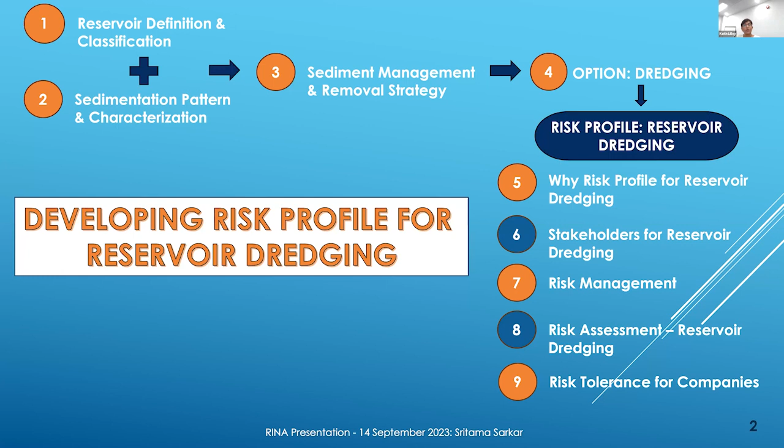Firstly, how we define a reservoir. So I have taken the reservoir definition from the National Geographic, and it says it can be any artificial lake which can be storing water, and most of the reservoirs are formed by constructing dams across the rivers. But a reservoir can be from a natural lake whose outlet can be dammed to control the water level. So throughout my presentation, whenever I say reservoir, I'm considering both man-made as well as natural reservoirs.

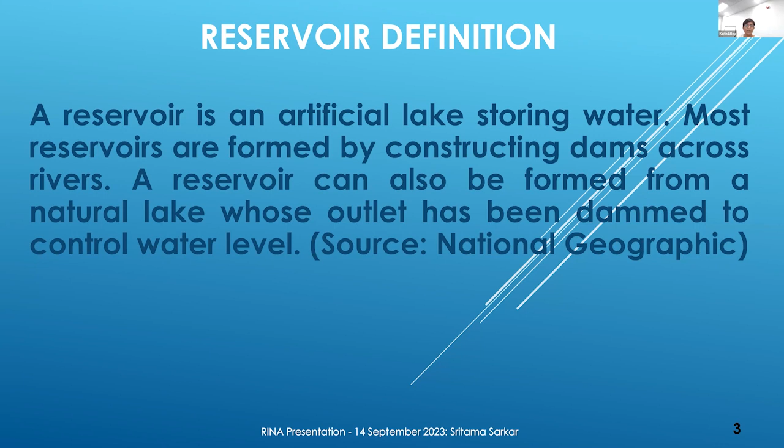Just an overview of reservoir classification. The origin, as I already mentioned, can be natural or man-made. The size of reservoir varies from country to country. Some countries use the storage volume, some the surface area, width or depth or length of the reservoir. Just as an example, I have taken the standard used in India.

So in India, the reservoirs are classified small for area less than 10 square kilometers, medium for area between 10 to 50 square kilometers, and large for area greater than 50 square kilometers. The position and the location of the reservoir is very important in terms of defining the material characteristics. So depending on the position and the location, the type of material present within the reservoir varies.

So for the position, it can be valley dammed, so it's in the mountainous region where the reservoir is between the valleys. The bank side, where water from rivers is taken into a reservoir or an existing reservoir. And coastal, it's very close to the coast, as is evident.

The purpose can be flood control or hydroelectric generation. It can be specifically for domestic, agricultural, or pisciculture purposes. It can be for municipal or industrial purposes, or for tourism purposes, or creating habitat for birds and animals.

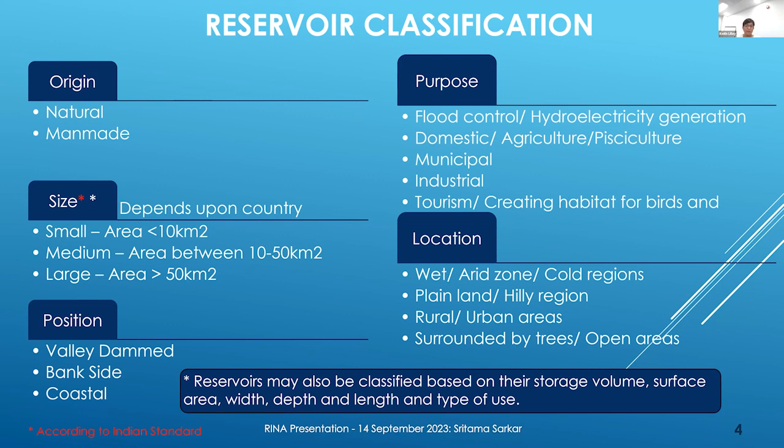This slide just shows us a schematic, and it's not to scale, of the sedimentation profile for a reservoir. So the words which are written in red, those are all the processes which you can find in a reservoir area. So the inflow can be the water from the surrounding streams, and the inflow can be water as well as different types of sediments. The seepage depends on the type of bedrock, how porous the rock is, whether there will be enough seepage.

Then there is evaporation and precipitation, which depends on the area where the reservoir is located. And again, the precipitation and the rate of evaporation can vary from season to season, and that controls the amount coming in and the water velocity inside the reservoir.

The left-hand side is a Hjulström diagram, which is the fundamental of relating the velocity profile within the reservoir to the particle size. So depending on how the water velocity profile is within the reservoir and the particle size, the particle can either be eroded or it can be transported or deposited. So here, at the beginning, where the deltaic region is, the velocity is quite high, and you get the gravel, cobble, and sand size particles here. As you move along, you get finer sediments towards the end of the reservoir where the dam is.

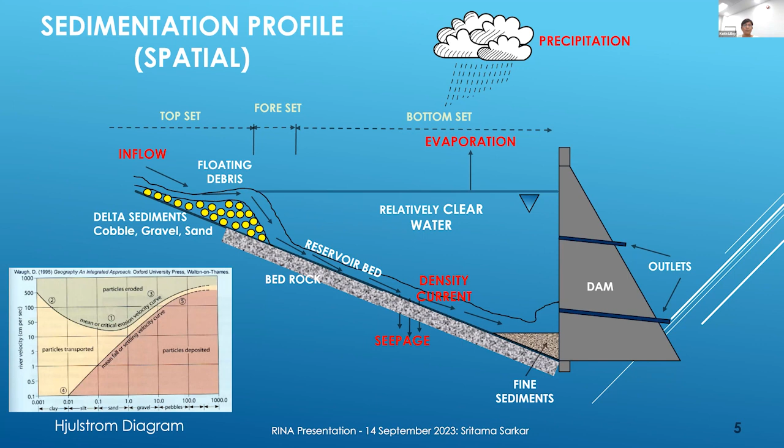So to know the material characterization within the reservoir is very, very important. And as I mentioned, all the processes which are prevalent for a reservoir need to be considered. So for the material, I have divided it into sediments, contaminants, and aquatic plants. These are the three main groups of material which you can find in a reservoir. The PIANC sediment classification is a very well-known classification in the dredging world, and that classification can be used for reservoir classification purposes as well.

The sediment source can be generated from the erosion of the bank, or can be transported by water, or can be waste disposal from nearby communities. And this is a big problem for quite a lot of countries. I will show some pictures later on, which show some of the waste disposed there. It can be transported by wind or water.

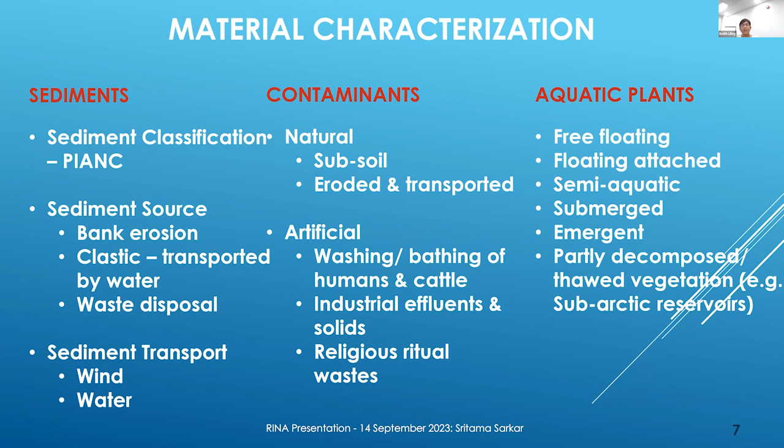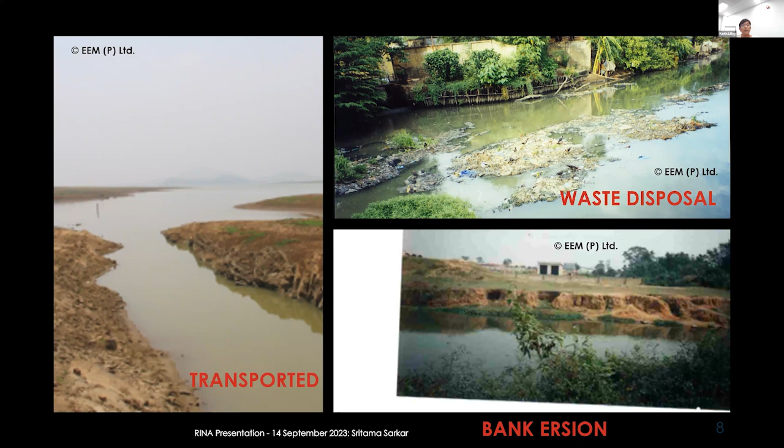So now we know a bit about the reservoir classification and the type of material which are present in the reservoirs. How do we tackle that problem? So there can be preventive sediment management, or there can be curative sediment management as well. Preventive management is you're controlling the sediment at the source. You can either create embankments or sediment traps, or you plant different trees which can resist the erosion of the soil.

Also, you can control the sediment while it's transported. So you can construct pre-settling structures, some weirs or small dams and barrages upstream. You can create silt traps as well. The other one is the contaminants. If it's a natural contaminant in the subsoil, it is quite difficult to control because you cannot change the subsoil. If it's on the reservoir sediments, then you can use processes like trapping or encapsulation using different geotextiles to encapsulate the sediment and transport it in a controlled manner.

Artificial contaminants, this is basically what is coming from the people living near the reservoirs. You can either have legal notices barring certain activities. You can take legal actions against industrial effluents and solids disposal from the industry. Or sometimes you can have some social pressure from the NGOs who are active in the local area to stop these kinds of activities, resulting in unnecessarily polluting the reservoirs.

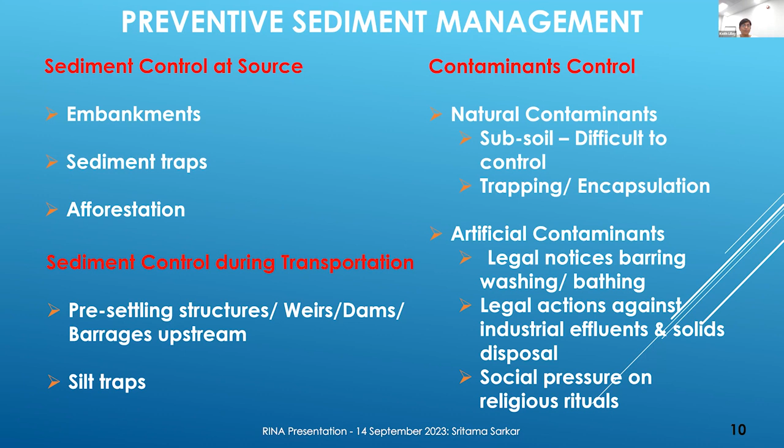The curative sediment management: for very small reservoirs, manual excavation is possible during the dry season. It's not very cost effective and it's a bit slow process, but that's an option for very small reservoirs in certain areas specifically. You can also use land-based excavation if the reservoir is dried up or there's a lot of sedimentation within the reservoir. You can use land excavators to excavate the soil.

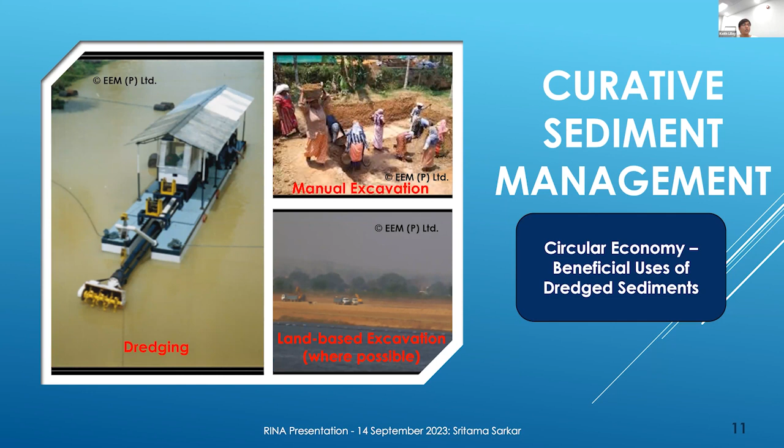Showing some of the different types of dredgers which can be used for reservoirs. So there are cutter suction dredgers which can be used for reservoir dredging. There can be plain or jet suction dredgers where basically you use high pressure jets to dislodge the sediment and then use a pump to suck it up and transport it. You can have mechanical dredgers like clamshell, grab, or backhoe, which can be on pontoons.

Airlift dredgers, it's not very common, but this is also one of the techniques. So essentially, you use compressed air, bring it down to the bottom where the suction mouth is, and you use the air to push the solids up. Just showing two specialized cutters.

One is the auger cutter. This is specifically used for places where there are contaminated sediments. So you can use this where the depth of cut is very shallow, so you don't spread the contamination from the place where you are cutting to the surrounding areas. So this is known as surgical cutting in dredging terms, not what you would think in a medical term, but that's also a term which we use in dredging.

The other one, which I showed before, is a rotovator cutter. This particular reservoir has a lot of weeds, so this rotovator cutter has the capability to cut the weeds and then later on use some other type of specialized cutter to tackle the sediments.

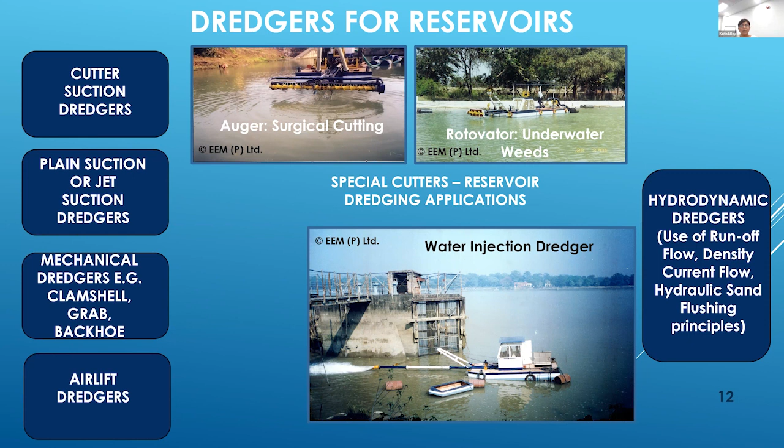Some of the other technologies which are also looked upon are not standard dredgers as you saw before. This is a submersible pump with the drive integrated with the system itself. This is from IHC, the TT pump series. There's a cutter, which is this black one, and the other picture has just a suction mouth. So you can dislodge the material, suck it up and pump it ashore.

These pumps are usually lowered by a winch system. So it doesn't move as effectively as a normal dredger, but it's very good for places where the big dredgers can't go or where you have very restricted areas.

The one at the bottom, the blue one, is Tiamat. This is from Haven Dredging in the UK, and they're using this technique now to do tests in the Haven port. Here two submersible pumps with drives are used to dislodge the material using jetting, and then a big pump, also a submersible pump, is used to transport the material using the density current principle. They're doing tests on that in the port of Haven.

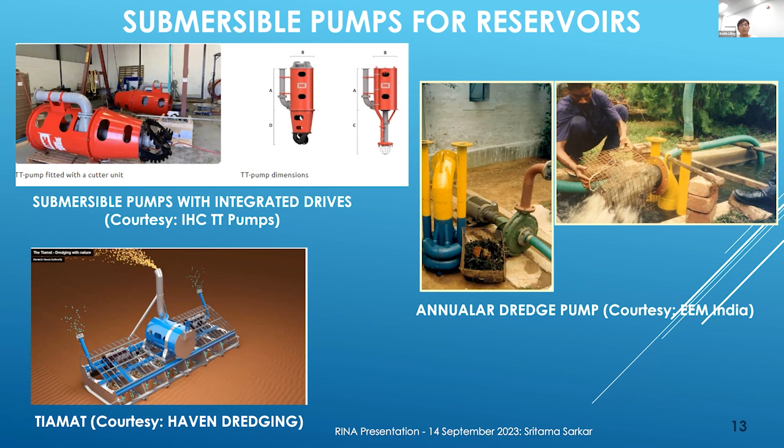This is showing some tests. You can see big cobbles which were taken up by this pump, as well as a mixture of sediment and different types of weeds. It was all handled by this pump, and there's some jetting associated with it as well.

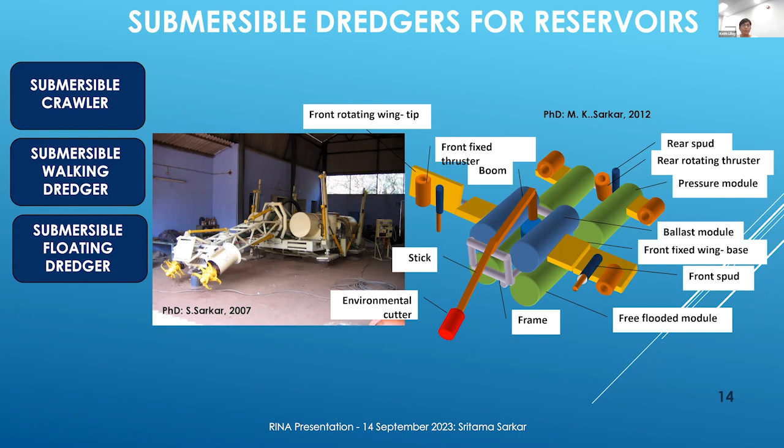Some more technologies. Where the depth becomes greater for reservoirs, you can use remote controlled submersible dredgers, so submersible crawlers, which basically have tracks. Then this one is a walking dredger, which can walk on different types of soil. Or you can also have a floating submersible dredger. So now we have covered most of the technologies which can be used.

So the main question is, why do we need a risk profile for reservoir dredging? The main challenges: I showed the classification of reservoirs and said this can be the purpose, but most of the time a reservoir is multiple use, leading to potential conflicts between the various stakeholders. There are always very complex and sensitive ecosystems associated with any reservoir. So that's another challenge.

Quite a lot of reservoirs are located in very remote areas with no good access road, so transportation and launching of the dredgers and equipment is difficult, because you might not have the relevant cranes. The disposal of the dredged material is a big concern, because reservoirs are landlocked water bodies. Also, sedimentation management and restoration involves public resources, so the public has a lot of say on how this should be done and whether they will be affected.

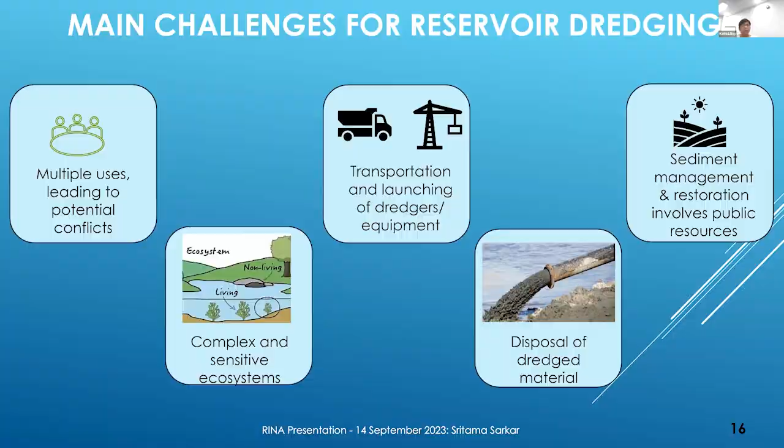Which brings us to the next slide: who are the stakeholders for reservoir dredging? Stakeholders are those who care about or have a vested interest in the project, whereas decision makers are the legal authority or have accountability for some management action. All decision makers are stakeholders, but not all stakeholders are decision makers. In most big projects, if it's a stakeholder-driven process with stakeholders involved from initial planning, it's effective in mitigating the risks. The same holds for reservoir dredging.

But the main stakeholders for any reservoir dredging are the end users or the consumers who actually use the reservoir for various purposes. The different non-governmental organizations usually have very low input to reservoir dredging decisions, and they are also not affected by the reservoir activity. You have natural resource management agencies, like local environmental agencies. They can have an effect on the decision for reservoir dredging activities, but they are not affected.

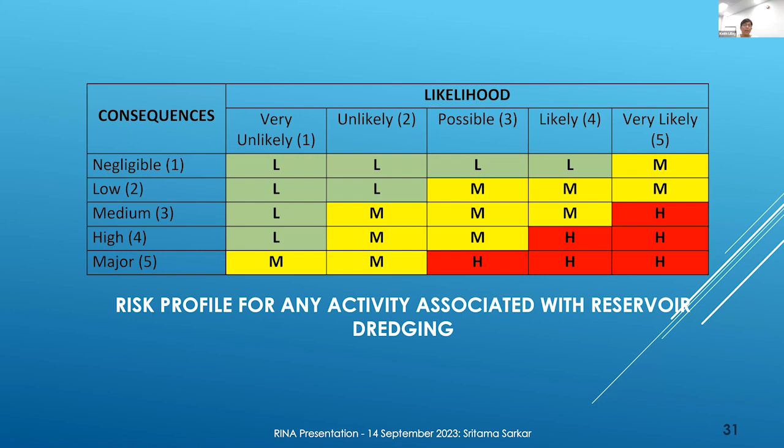So now I will show some of the examples. When we talk about risk management, people mostly think of the execution phase. But even for the pre-tendering phase, there are hazards related to different activities, which can give a huge amount of risk to the overall project itself. So for example, if you determine the sediment volume, distribution and classification as one of the pre-tendering activities, and you get inadequate or wrong survey data, that can affect your technical, economical, or commercial risks.

Because technically, you can choose equipment which is not adequate for the purpose. That can then affect your cost, and hence economical and commercial risks can come. And the stakeholders who will be affected are the company who has asked for the reservoir dredging activity, and the contractor and the subcontractor.

Again, the same goes for if the dredge scope is defined wrongly, then the same type of risks will be there. If, when you go for the initial reconnaissance survey, you don't find a suitable disposal area, and you don't mention that, then that's another risk.

And the most important thing during the pre-tendering phase is defining the liability period of dredging. So quite often for dredging works, people say, oh, okay, this much material has been dredged, but then again with nature, this material has filled up. So you define a liability period for which the dredging contractor will be responsible for any sudden influx of material from the site. So that is a very important clause to put in the pre-tendering phase, which then gets transferred into the tendering phase as well.

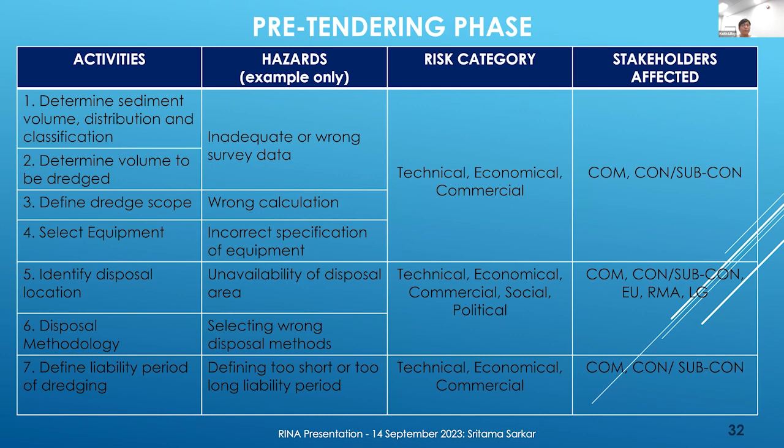Same with the tendering phase. The tendering process, if it's a very poorly written contract, and that all of us will know, if you select the wrong contractor with the wrong track record, that can be a risk. Even from the contractor side, if you don't obtain the correct information about the company, then that's again a risk on the contractor. The deliverables by the company and the contractor should be defined also properly in the tendering documents. So these are just examples, and depending on various projects, this can change. But as I said, the risks should be considered even starting from the pre-tendering phase and not just only the execution phase of the reservoir dredging activity.

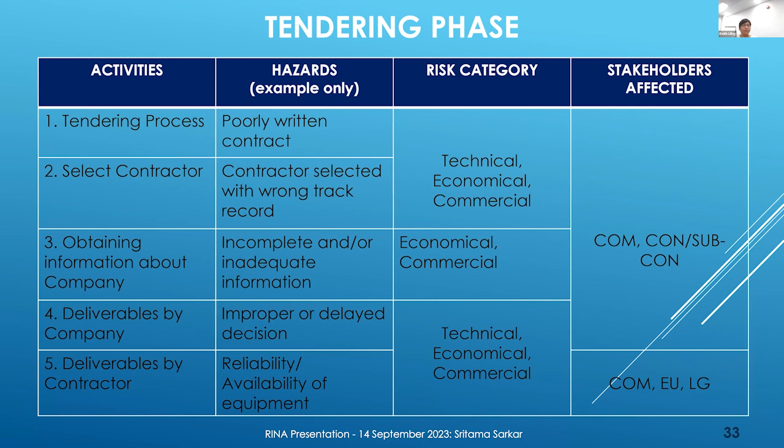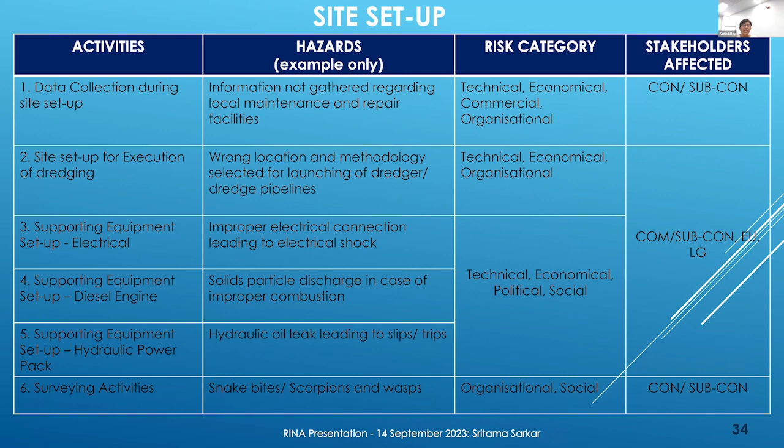The site setup, again, you collect wrong data. You don't have the supporting equipment like electrical connection where the dredging needs to be done. So all those things need to be looked into. This is just a table to show how you can do reservoir dredging hazard and risk rating. So this is just a template. So you have different phases of the reservoir dredging activities. And then you have the activities, you list the hazards, effect of the hazards, you rate them, and then you control the measures.

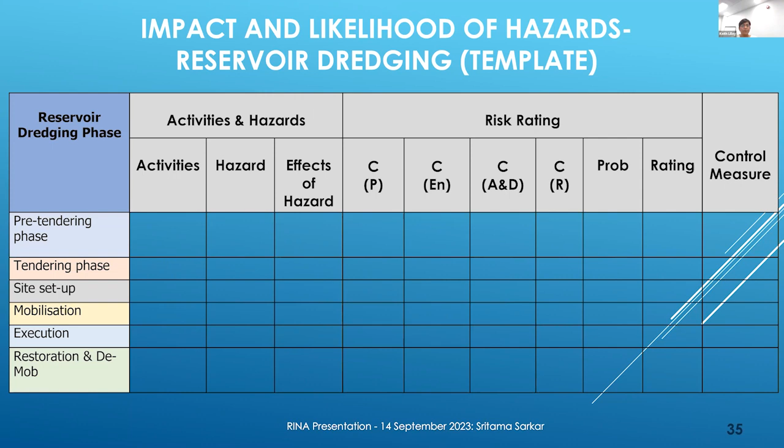So the main points which I would like to highlight at the end of this presentation: for any reservoir dredging activity, you should have adequate knowledge of the reservoir and the ecology associated, and that is the starting point for doing any risk assessment for the reservoir dredging activity. You need to know the sedimentation pattern and the material characteristics. And even though we know this, quite often in dredging activities we don't get adequate data about the material, and that's quite true for a lot of offshore projects as well. So it's very important that we have adequate knowledge of the material characteristics present there.

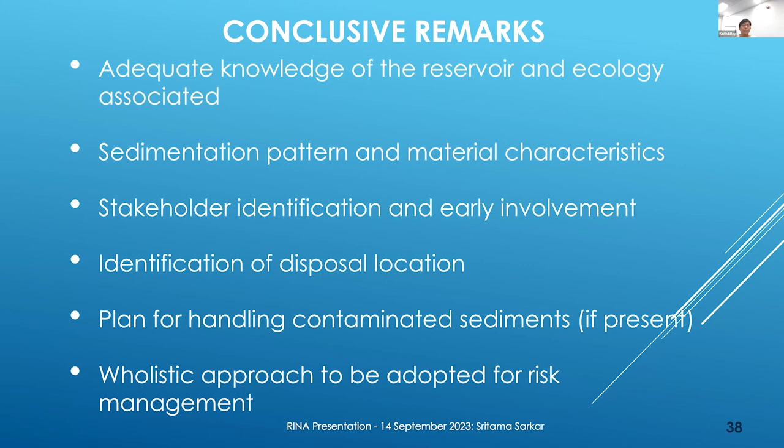And last but not least, be adaptive for the risk management of reservoirs. So don't take it just as a one-off problem, but look at it as a holistic approach. Look into the ecology associated with it before designing any dredging or sediment management removal strategy. So with that, that brings me to the end of my presentation.